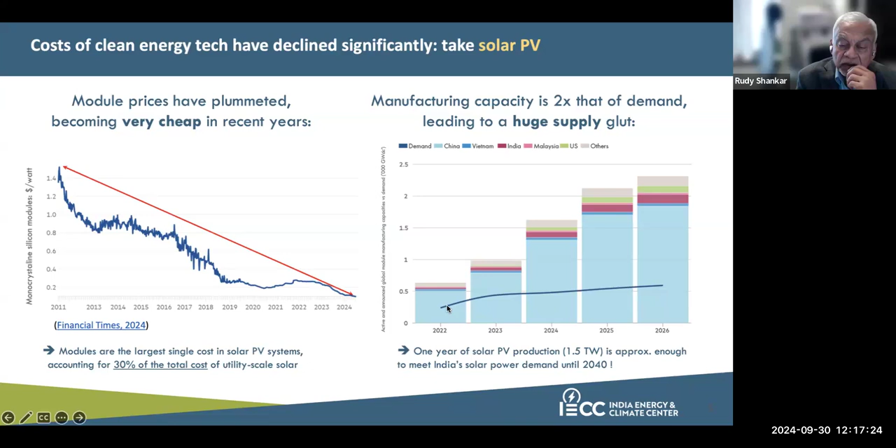Okay, perfect. So this blue line shows the total solar PV demand in the world, which today is approximately 500 gigawatts per year.

So the world today installs approximately 500 gigawatts of solar PVs each year. Nearly 250 to 300 of them are installed in China alone. Nearly 20 to 30 gigawatts in the US, the same number, 20 to 30 gigawatts, in India, and all other countries combined is another 100 to 150 gigawatts, give or take.

But anyway, the point is the total solar PV demand is 500 gigawatts, but the total solar PV production capacity is more than 1 terawatt or 1,000 gigawatts. So the manufacturing capacity of solar PVs is nearly double that of demand. Now, this has two implications. Implication number one is

this overcapacity in solar PV production is here to stay, which means that solar PV panel prices will continue to be lower and continue to fall over the next decade or so. And second, it also erodes manufacturer margins pretty significantly, because once you have overcapacity, you have to kind of short sell your PV prices. That reduces the manufacturer's margin.

But at the same time, the solar PV supply chain is also diversifying. For example, the light blue color on these bars shows the manufacturing capacity in China. And then there are other countries such as India, the US, Vietnam, and other European countries. They're also accelerating their efforts to manufacture solar PV panels. So as a result, it is extremely likely that we will continue seeing a decline, not at the same rate though, but a continued decline of solar PV prices in the world over the next 5 to 10 years.

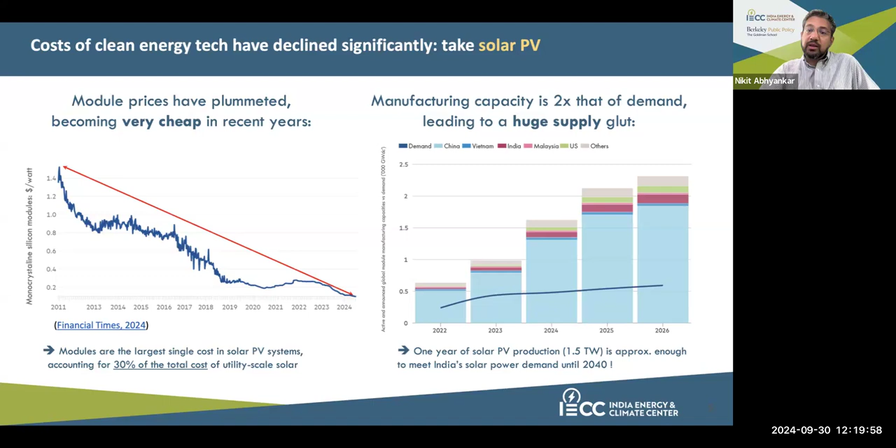Now, this story is not only limited to solar PVs, okay? With batteries, you see a very similar story. The manufacturing capacity of batteries, in fact, is nearly 4 to 5 times higher than the global battery demand today, which implies that over the next 10 to 15 years, even if there are no new investments made in battery manufacturing capacity, you would still see sustained battery cost declines, given how much battery capacity we've already built or have started to build.

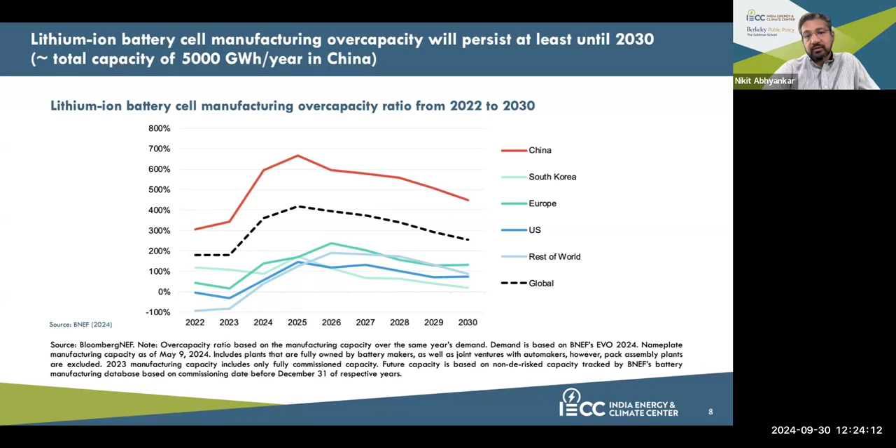So now coming back to what this means for some of these strategically important sectors for India: this drop in battery prices, drop in solar prices, and so on. Let's start with battery prices, okay? One thing I did not really mention: this is again the battery production capacity chart that we saw a few minutes ago. Just focus on this red part of the column, okay?

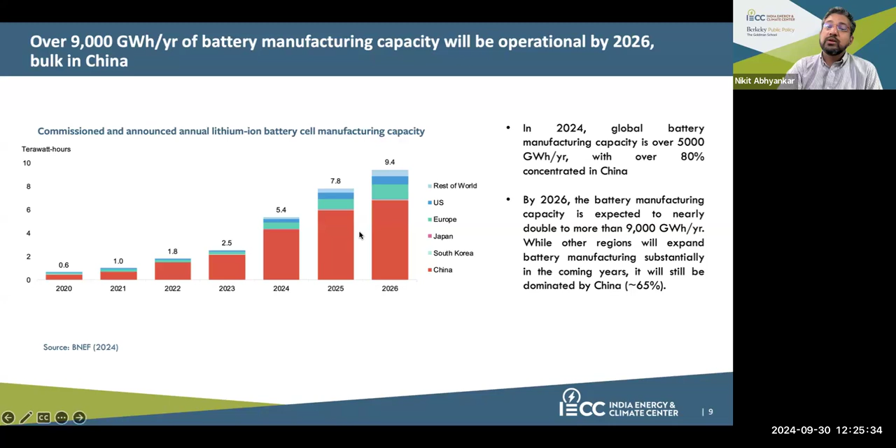Red is China. So currently in 2024, more than 80% of the global battery production capacity is located just in China. And that is largely going to continue, even though the US and Europe, as well as India and other countries, will ramp up their battery production efforts. China will still dominate the battery supply chain and battery production. And that is also being reflected in some of the strategically important sectors.

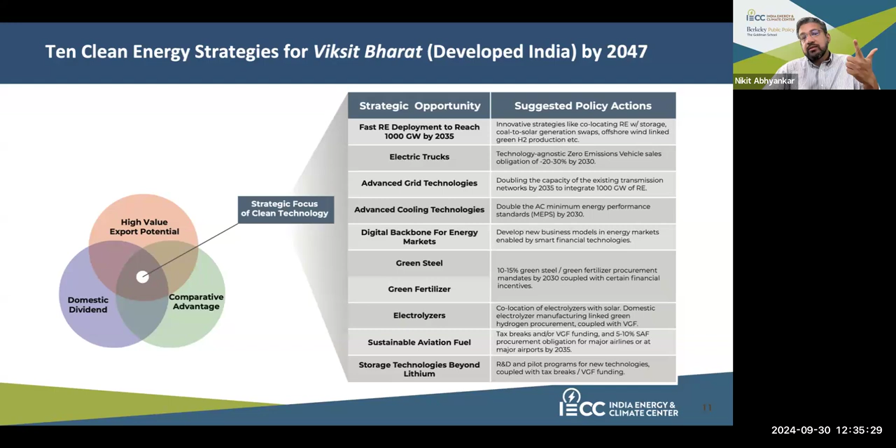I'm not going to go into the details of each of those. We're only going to talk about three or four most important ones. First is the deployment of renewables and storage. And that is true globally, not just in India, but also in the US. Then we are also going to talk about green hydrogen, what should India be doing for industrial transition in general? What's the role of green hydrogen, green steel, green fertilizer, and so on and so forth. And we are also going to talk about electric vehicles and how the transition to electric vehicles in India is quite different from what we generally think in the US. Okay, we're going to focus on just these three: renewables plus storage, electric vehicles, and green hydrogen in industry. Okay.

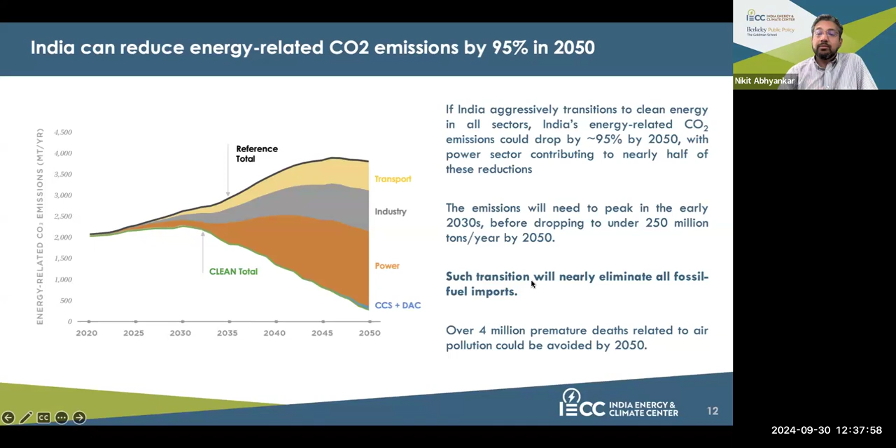And they can also reduce their CO2 emissions dramatically by nearly 95% by 2047 and 2050, in addition to avoiding over 4 million premature deaths due to local air pollution by 2050. So this is the big picture on energy transition. What could be possible? Which are the key sectors they should focus on, and what would be the big picture impact? Now let's drill down on those three opportunities that I specifically talked about: RE plus storage, EVs, and green industries. So let's talk about RE plus storage.

So as India moves from IC engine vehicles to electric vehicles, as Indian industry moves from fossil fuel powered processes to more electrified and green hydrogen based processes, India's electricity demand is also going to increase pretty rapidly. And electricity demand is going to increase because of three factors. Number one, as I mentioned earlier, just the inherent growth in India due to rising incomes, industrialization, urbanization, and so on, which is captured by this black line.

So the black line shows the inherent load growth in the country, which was approximately 1,500 terawatt hours in 2022-2023, which will more than double or triple over the next 20 to 25 years. That's a growth of around 5 to 6% each year. So India's electricity demand is almost doubling every decade or so historically, and it will continue to do so in the future. And as I mentioned, the additional causes of electricity demand is the transport electrification as well as industrial electrification and decarbonization through green hydrogen.

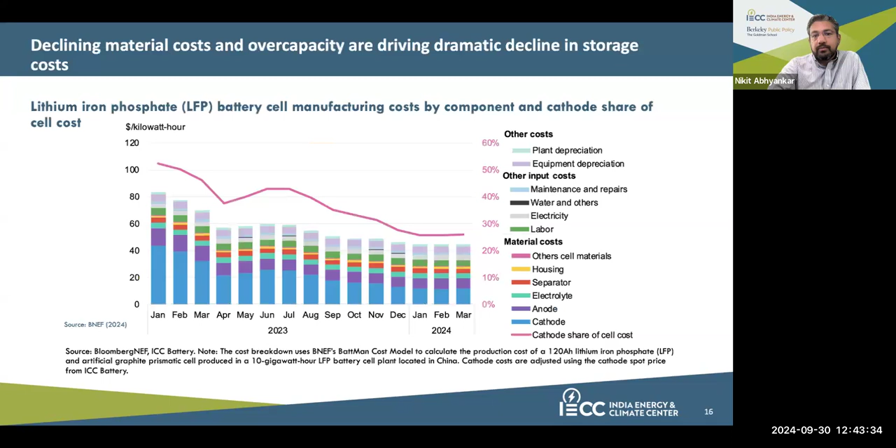So nearly 1,500 gigawatts of renewable capacity is in the US interconnection queue: 1,100 gigawatts solar, 350 gigawatts of wind, including some offshore wind. In addition, 500 gigawatts of standalone batteries are in the interconnection queue. And 95% of the solar capacity proposed in the Western United States comes with some level of energy storage, particularly batteries. So even in the US, a massive transformation is just about to happen.

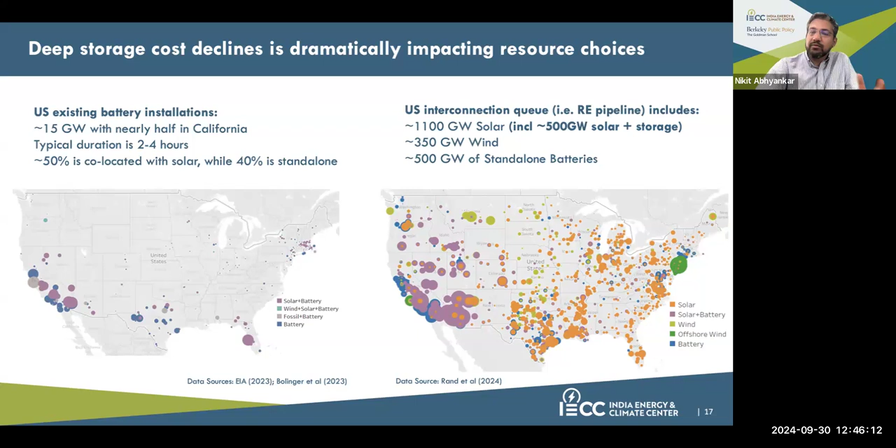And there are many reasons. I won't go into the details of why we see this rapid transformation even in the US, but it is happening and it is very real. And as I mentioned, not all of this 1,500 gigawatts of solar plus wind capacity in the interconnection queue is going to materialize. Only a fraction will. But nonetheless, this is a huge jump from where we are in the US, and that is also being reflected all over the world.

All right, so moving on. Let's talk about electric vehicles in India. Typically, when we talk about electric vehicles, the conventional wisdom says we should just talk about electric cars, and that's what we usually visualize whenever we talk about EVs, either Teslas or other swanky electric cars. But India is slightly different.

So if you look at the US, nearly 70% of our oil consumption happens in passenger cars, and only about 30% of the oil consumption happens in trucks and buses. Whereas in India, this proportion is exactly opposite, meaning that 70% of the oil consumption in the transport sector happens in trucks and buses, freight movement and bus-heavy passenger movement.

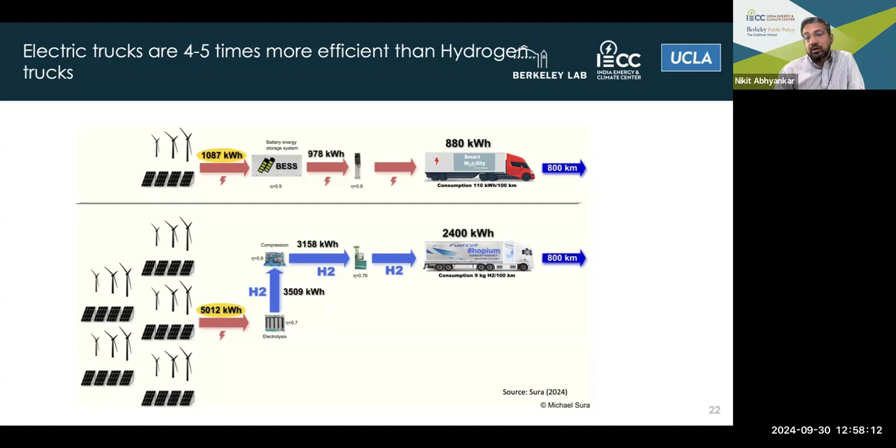Refueling speed needs to be considered, but that is not that big of a concern for trucks, because they usually have very long drive cycles. They drive for 8, 9, 10 hours a day. So they have significant opportunity to schedule their charging or refueling, and 30 to 45 minutes to 1 hour of recharging could be scheduled during their mandatory rest stops anyway.

Okay, no more questions so far. Go ahead. Okay, so let's move on.

But again, the key caveat is this is on a dollars per mile basis, a dollars per kilometer basis, even in India. So it's really just the question of addressing the first cost barrier of electric vehicles, addressing the charging infrastructure barrier for electric vehicles. That is really critical to make sure India embarks on this EV pathway.

And the charging infrastructure discussion in India is quite different than it is in the US, right? In the US, most houses have access to garages, to driveways, to dedicated private chargers for their cars. But that's not the case in India. Most houses are multi-unit apartment complexes, and all of them may not have a dedicated parking spot. Even if they do, they may not have access to an electrical charging system there. So public charging infrastructure and fast charging becomes even more critical for EV transition in India than in the US.

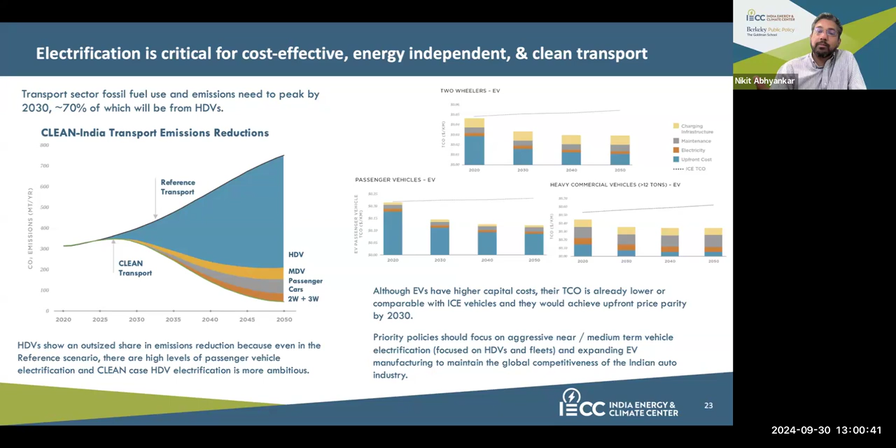And there is significant activity in that space by the government, but not as much or not as fast as they should have. For example, they are currently electrifying or building charging infrastructure along all major freight corridors and highways in India. But that should be done faster for truck owners to actually adopt these electric trucks.

All right. So I'm just going to skip this in the interest of time. So one of the common questions that we always get asked is, well, what about lithium? If India really goes along this EV-led growth, and if India really builds a lot of batteries even for the grid, what about the battery supply chains? What about lithium? Wouldn't India just be importing lithium?

But of course, this is easier said than done. These reserves have just been found. For those reserves to actually turn into resources and turn into actual production of that lithium, there is still a long gestation time that one needs to account for. But this is where India has an advantage, because India's vehicle market is not as matured as the US vehicle market. India still has time to build those supply chains and still not lose a lot of steam on this electric transition.

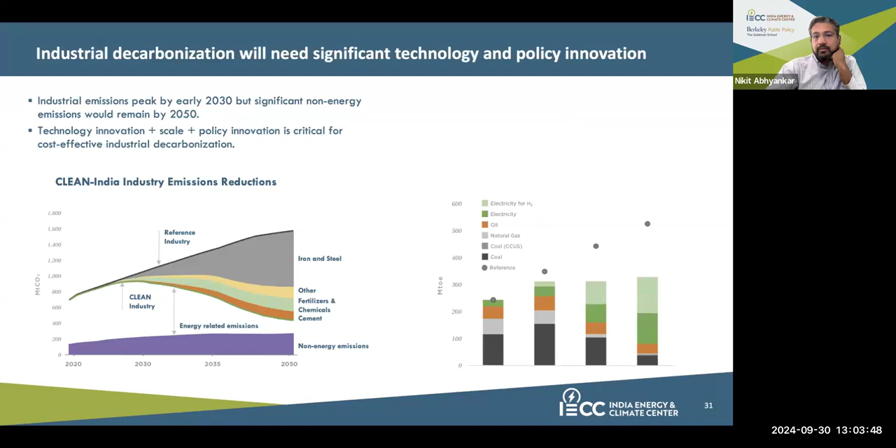Now let's move on to industries and green hydrogen. And I'm just going to spend no more than 5 minutes on this, okay? So, hydrogen. There has been a lot of talk about green hydrogen that you would have heard. And hydrogen is of course the most abundant chemical element in the universe. But the key is that doesn't matter. On Earth, we have to obtain it from the energy sources that we have available on Earth.

And you might have already heard there are several different distinctions of hydrogen. There is gray hydrogen, which is produced mostly from natural gas, and obviously has a very high carbon footprint. Then there is blue hydrogen, which is still produced from natural gas, but with sequestered carbon dioxide emissions. Then there is purple hydrogen, which is produced from nuclear energy.

And then there is green hydrogen, which is essentially produced using clean electricity obtained from solar and wind or other renewable sources. You put that electricity through an electrolyzer that splits the water molecule, H2O, into hydrogen and oxygen, and then that's how you get hydrogen.

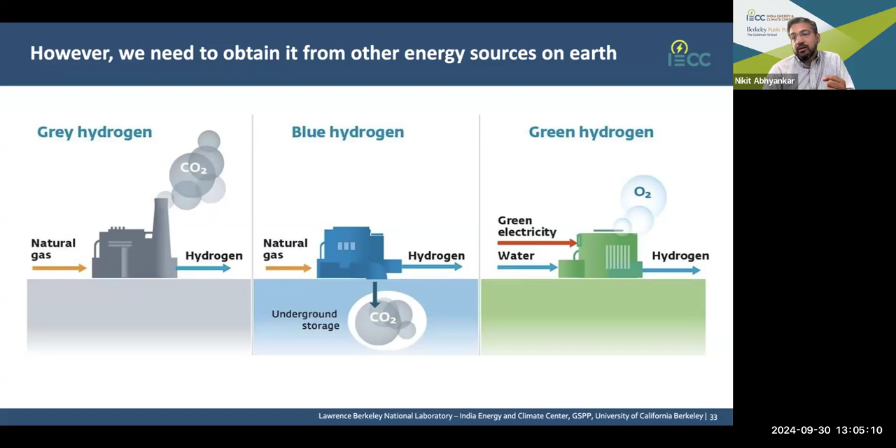But the key challenge with this green hydrogen is it is still pretty expensive. It is significantly more expensive than gray hydrogen, which is produced purely from natural gas, and definitely significantly expensive still, even if you want just a flat block of green hydrogen, meaning that you want green hydrogen supply 24/7 at flat block. That is still far more expensive.

And what we are projecting is even in the future, 2030, 2040, 2045, the green hydrogen cost would still be more expensive than gray hydrogen. We just have to accept that as a fact. And that's why we need some massive improvements in electrolyzer technology. And that too, no rocket science improvements; just using simple low-cost electrolyzer technologies can essentially go a long way.

Second is we need some innovations in hydrogen storage. Again, I wouldn't talk a lot about hydrogen storage; I'll be happy to take questions later. And third is we also need some innovation on how that hydrogen is used. For example, instead of storing hydrogen, can we use hydrogen whenever it is produced by changing our industrial processes to a certain extent? With these three factors, electrolyzer innovation, hydrogen storage innovation, and industrial process innovation, there is actually a very clear pathway for this green hydrogen price to be comparable to gray hydrogen price.

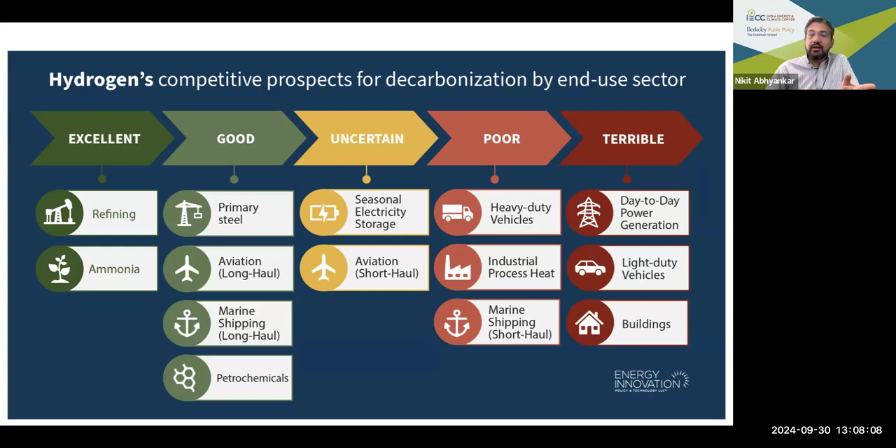What are the terrible uses of hydrogen? Using hydrogen to generate electricity, using hydrogen in our vehicles, using hydrogen for buildings, for heating and cooking, etc. These are absolutely terrible uses of hydrogen and need to be avoided.

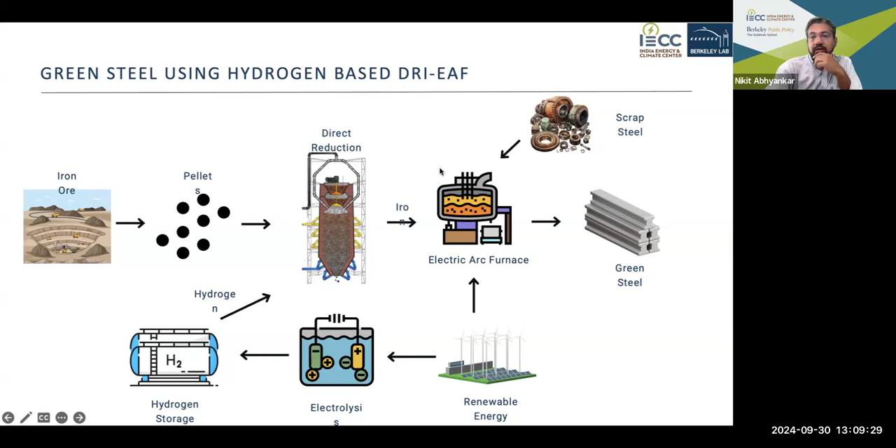So renewable energy, through electrolysis, produces hydrogen, which is put into the DRI furnace, and the hydrogen here acts as the reductant, right? So iron ore, which is ferric oxide, Fe2O3, reacts with hydrogen, and that produces Fe, which is iron, plus H2O, steam and water. The iron is then put through the electric arc furnace, and we get the green steel.

But the interesting point is, as I mentioned earlier, India currently is the second largest producer of steel in the world. The first largest is China. China produces nearly 1 billion tons of steel every year. India produces close to 120, 130 million tons of steel every year. So there's a massive growth in steel production in India that could be driven purely by domestic demand, in terms of the roads they're building, the buildings they're building, flyovers, and other infrastructure.

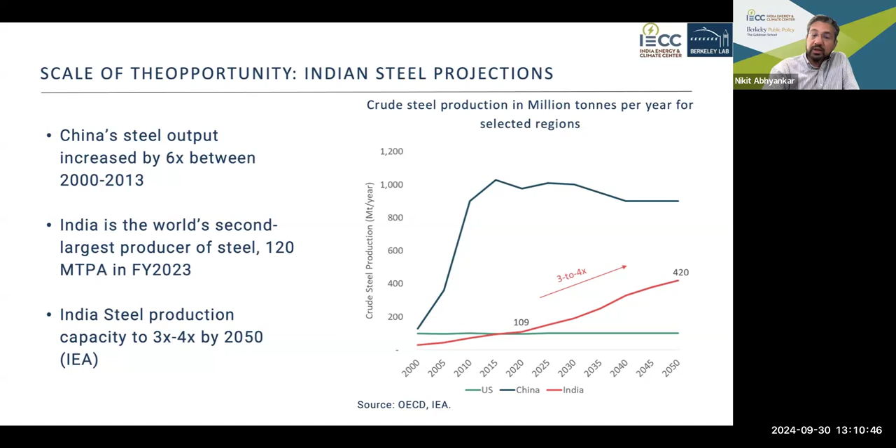So India's steel production is expected to nearly quadruple over the next 20 to 30 years, from nearly 130 million tons in 2023 to close to 400 to 500 million tons by 2050. And this again goes back to my point of leapfrogging. 75 to 80% of India's steel production capacity that will exist in 2050 is yet to be built. And that's why there's this huge leapfrogging opportunity to green steel that India can capture. Of course, green steel is going to be more expensive than conventional steel.

And the key is getting cheap green hydrogen. That is the only way to get green steel, because this is not really a technology play. We generally know the technology for green steel production because there is already a lot of steel production that happens using natural gas. Natural gas furnaces also produce steel in a very similar industrial process. So hydrogen-based green steel production is not necessarily more of a technology play than more of an economics play.

So bringing the cost of green hydrogen to under $2 per kg in India is absolutely critical for green steel to be more cost effective and comparable to the conventional coal-based steel. There are multiple ways in which one can reduce the cost of green hydrogen. I think the most critical, as I already mentioned, is bringing down the cost of electrolyzers. Electrolyzers today cost anywhere between $1,200 to $1,500 per kilowatt, which needs to be brought down to under $300 per kilowatt or so. There is a pathway that can happen.

For example, in the US, they usually use an electrolyzer called PEM electrolyzer. The Chinese usually use an alkaline electrolyzer, which is performance-wise a little inferior, but cost-wise 80% cheaper. So there is some innovation that definitely can happen in using alkaline electrolyzers for green hydrogen production and so on and so forth. Again, I'm not going to go into the details, but the point is bringing green hydrogen cost under $2 per kg is absolutely critical. And this is obviously critical for India, but this is not just India. This is also true globally.